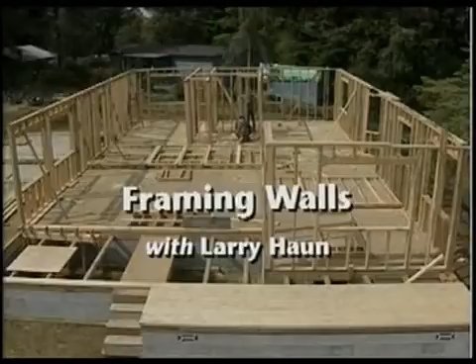Hi, I'm Larry Haun. This is the second in a series of 3 tapes which accompany a book I've written about framing an entire house. Now in tape 1, we framed the floor. In this tape, we're going to frame the walls. Here's a preview of what you're going to see.

We start by laying out and snapping wall locations on the floor deck. Then we cut and position the wall plates. Cut the parts for the walls and detail the plates. Next we can nail the walls together and lift them into position, both the exterior walls and the interior. After nailing all the walls together at the laps, we finish up by plumbing each wall and aligning.

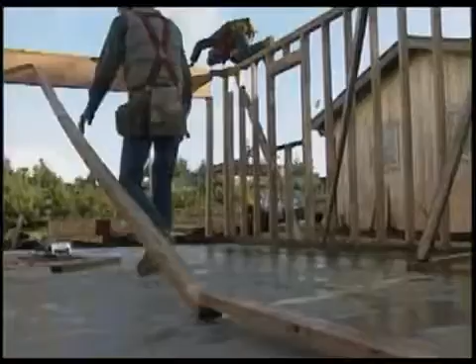Well, it's nice to have the floor down. Once the floor is down, we know we don't have to work down in the dirt and the mud anymore. And now we know that it won't be long before we have walls standing up here. To get to that stage, we have to do some layout. Now, layout's the process of taking these wall lines that we see here on the blueprint and transferring them out to the floor. We do that by means of a chalk line.

Now, layout really is simple, but I know from looking at a blueprint and seeing all of these lines out here, people say, wow, that looks difficult, but it really isn't. Here's how we do it.

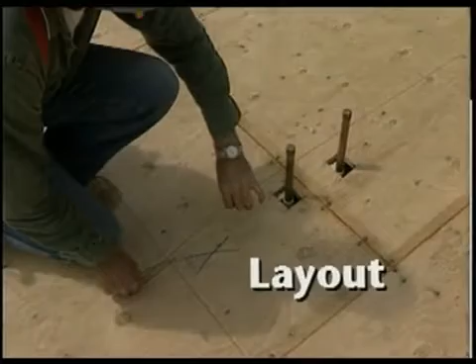Our plans for this house show that the outside walls are 2x6. And to mark the location of these walls on the floor deck, we use a 2x6 block, marking in 5.5 inches from the edge on each end of the building. Now, if your walls are 2x4, well, then use a block that size. And next, we run a dry line down the length of the building between those marks, and we tie it off.

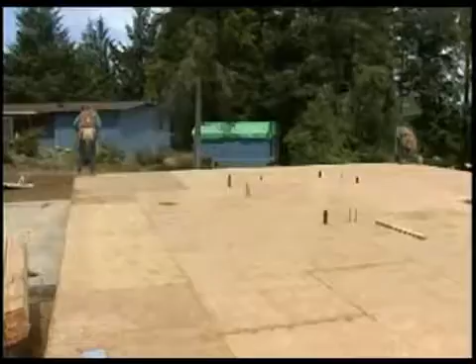We mark near the center of the dry line so we can snap the line in 2 sections. Now, especially on long buildings, this helps to ensure that our line will be straight. On shorter runs, you can just use your chalk line. I got 32.3. At this point, it never hurts to recheck to make sure the exterior walls are parallel. Okay, we're within 1/8, Joe. Looks good.

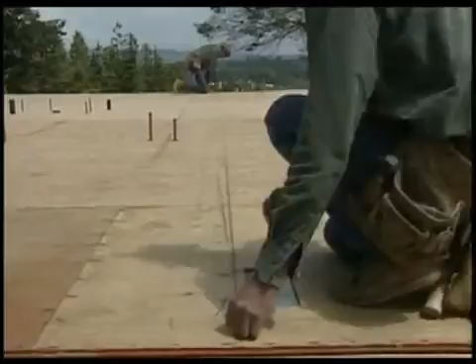We need to start with a long through wall, Larry, which is this one, and it's 17.3 outside to center. Okay, let's do it. Okay, we're at the edge of the building. Go ahead and mark. 17.3 center of the wall, add 1 3/4 inches to the edge, mark it, put an X on the side that the plate falls on. That's it. On our plans, the measurement for this wall is from the outside of the building to the center of a 2x4 wall. We snap the edge of the wall by measuring out 1 3/4 inches more from the center line.

Okay, Joe, that first wall is 12 foot 7 in, from the outside of the building to the center of that through wall. So Joe measures out 12/7 to the center of the wall, adds 1 3/4 inches to the edge of the 2x4 wall plate, and then he drives an awl at that point. Now he can continue on and mark for the next wall. Now, of course, each wall line needs a pair of marks on the floor before it can be snapped, and that's what Joe's doing here on the 12/7 wall.

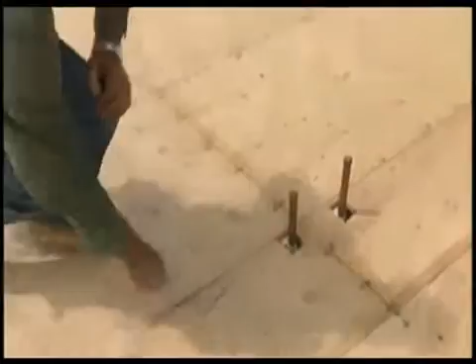And you can see this wall has some plumbing in it. Joe's laying out a bathroom wall here. Most of our interior walls are 2x4. This one's got a lot of plumbing in it, so we'll make that one 2x6. And just so we don't forget, Joe marks it right on the floor.

When we lay out a building, we typically lay out the long walls first, and then the short ones, like this short bathroom wall. Now, it's important to keep your plans handy so you can refer to them often. Accuracy at this stage makes the work that follows a lot easier. 16'6", 1, 2, 16'3 1/4. I'm coming in.

There's a small hallway right here, but no door and actually no wall, so we're going to mark this one out. And down here the line got run by a little bit too far, so we'll mark it out too so it doesn't get plated. All right, Larry, I guess all we got left to do is run an end on that wall right there and we're done. Okay. What Joe means by running an end is marking where a wall stops, and we note that very clearly on the floor.

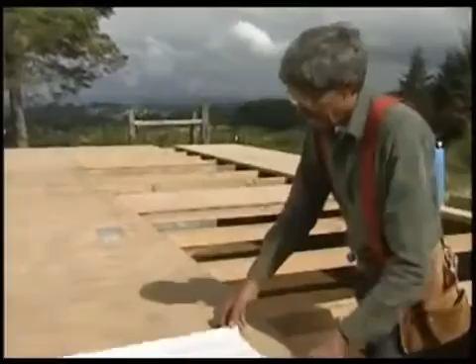Well, it didn't take Joe and I long to lay out this floor. We're all done, except we still got a rake wall. Take a look at these blueprints. Here we are right here. This is a rake wall. Goes up at an angle, follows the slope of the roof. It's the wall that sits right here on the end, all the way down through here.

We'll build it and we'll raise it up like this, and it'll go up like this, following the pitch of the roof. Take a look at the blueprints again. Each stud in this wall is going to be a different length. In order for Joe and I to build this wall, we're going to lay it out on the floor full scale. Here's how it's done.

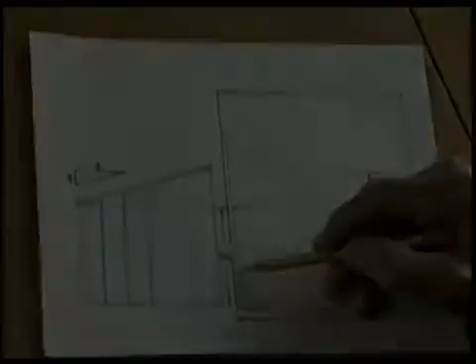I've been doing some sketching here to show you how to lay out a rake wall over here on our floor. Now this rake wall has a pitch of 4/12. Well, back on our floor, these dotted lines represent the chalk line that we snapped for our wall plates. So down here at the bottom chalk line, we come up 92 1/4. That's a stud length. Make a mark.

At the bottom, on the outside of the building, we come over 12 feet and make another mark. From that point again, up 92 1/4 inches. We make another mark. From this point, we come up in feet, whatever our pitch is in inches. 4 inches, we come up 4 feet. And we connect those 2 points.

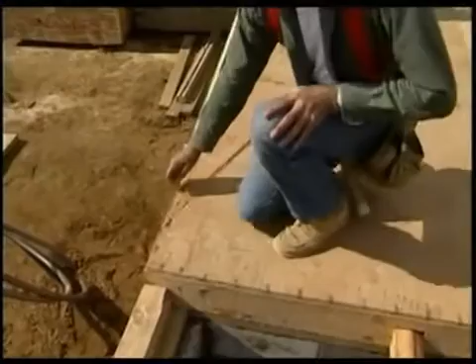Now, doesn't matter how wide this rake wall is. We can build it to here, or we can build it to way over here. With this outline, we can build it right on the floor. And we come up here 92 1/4. And another 4 feet. Then we come over here 12 feet. From the outside. Got it?

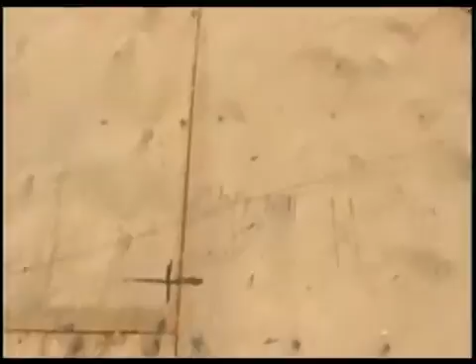Okay. Then at that point, we come up again 92 1/4. And 4 more feet, and that X is right there. So without using a lot of fancy math, we're able to establish our 4/12 pitch. We snap a line right through our X's. First one side, then the other. And this leaves us a full-scale outline of the rake wall right on the floor.

Well, Joe and I have all these wall lines snapped out on the floor. So we're ready to start plating. Plates are the tops and the bottoms of walls. The important thing to remember is that these plates need to be put down in a certain order. If we put them down in the right order, then framing walls is going to be a lot easier. So let's take a look how we do that.

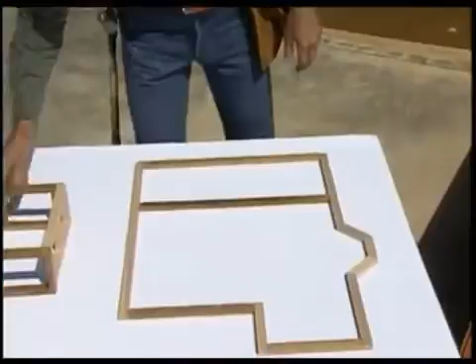Actually, it's quite easy. Here we have a model of our floor. And what we've done is we've taken these long outside walls, and we've run them all the way through, from outside to outside. We call these walls through walls. Here, at the width of the building now, these walls butt into the through walls. So we call these walls butt walls. We have them here, here, here, and here. If you plate like we have it here, you're going to find that wall framing is a whole lot easier.

Here on this model, I want to show you an example of how not to plate. You'll notice that none of these plates run all the way through. They run through on one end, but here, on this end, it butts into its neighbor. And that's true of this one, and this one. Now, if you plate like this, we call this style log cabin style, you'll find that when you raise walls, you'll always have one in the way.

But look, let me show you something simple. Make a little change. See what happens? You now have these two walls that run all the way through. And these walls butt to them. So, we'll build our walls like this. We raise these two through walls, and then we can raise these two butt walls. No problems.

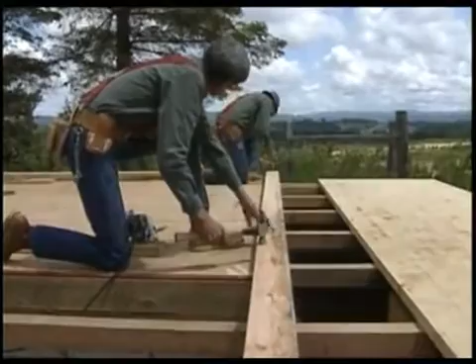At my end, I saw to the chalk line. I don't need a square or a measuring tape here to cut accurately. Here's the top plate. It's got the same length as the bottom plate, and it tacks right on top of it.

This is another butt wall. Got it, Joe? Again, tacked right on the line. I use a 2x6 block as a guide to cut it back 5.5 inches from the through wall.

We just keep working our way around the building, positioning, tacking, cutting. But take time to cut these plates accurately. It'll save you a lot of headaches later on.

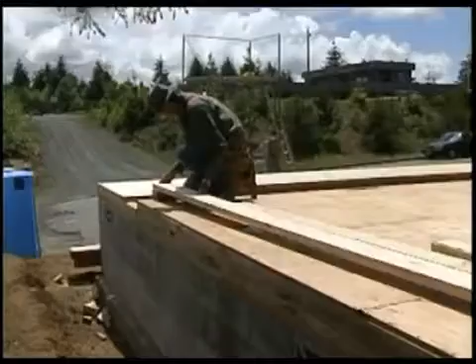You can see that this wall has some plumbing pipes in it. Here we can cut the plate so it butts the pipe. Out here in the center, we'll notch our plate to fit around these pipes. In colder parts of the country now, the code may require you to fill these holes with insulation.

And here, this top plate can't be tacked on top of the bottom plate because the pipes are in the way. So we just tack it on the side. Now it's ready for layout. Here at the end of the building, another way of tacking a top plate in place. We can set it on edge and toenail it to the bottom plate.

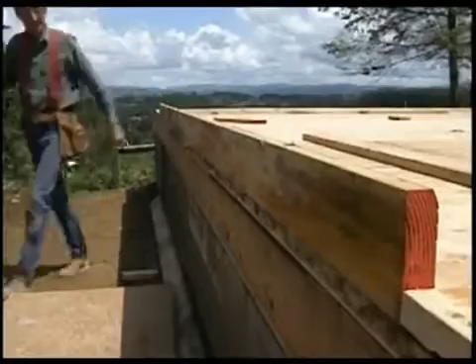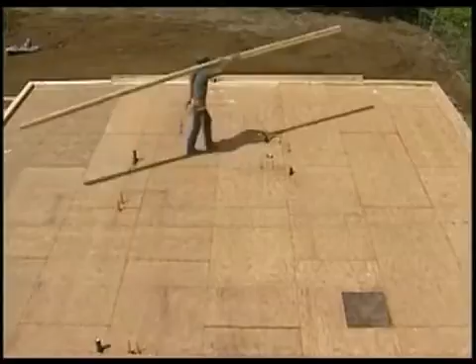Here on the other side of the house, we tack two pieces of plate at each end. Where they lap in the middle, we can cut it by eye. We're done tacking the exterior plates. Now it's time to tack and position the 2x4 interior plates.

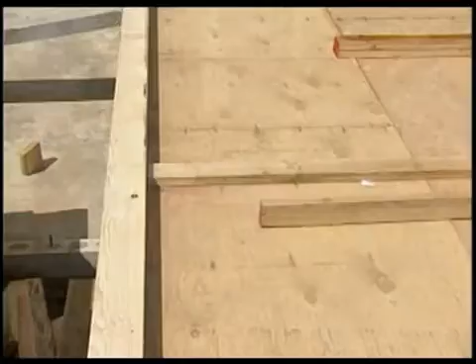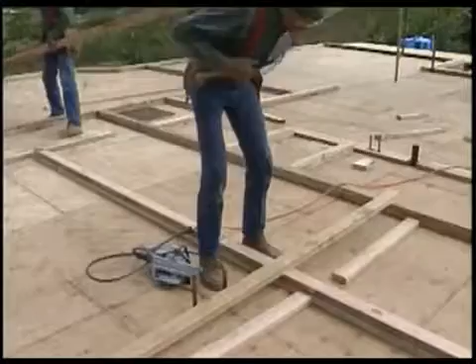Yeah, so I'll just go ahead and cut. There I go. Okay, cut that. Here are the plates for that end wall. We cut them both right on the line. That's what we do. We just keep working our way around, plating the long walls first, generally, and then filling in the short wall. It's important to tack the top plate directly over the bottom plate.

You probably noticed that I've been doing all the cutting and Joe does most of the nailing. We work together. It's just more efficient that way. Well, Joe and I are moving right along. This place is finally beginning to look like a house.

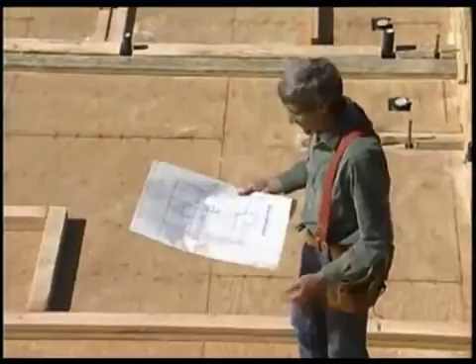All the plating is done, and you can see over here the outline of a bedroom. Here's a bathroom, and back over here in this corner another bedroom, and I'm standing right in the middle of a hall. We've done what we wanted to do. We took the wall outlines from the blueprints and we transferred them down here to the floor.

One other thing I want you to notice as you look at these rooms, you'll see over here there's not a doorway and there's not a window in the place. We paid absolutely no attention to any door or window. Well, let's take a look at these blueprints.

Here's a small closet with a doorway. What it looks like is that the wall comes over here and stops, then the doorway, then the wall starts up again. Well, here's the closet right down here. Both those plates run all the way through. There's no visible sign of any door.

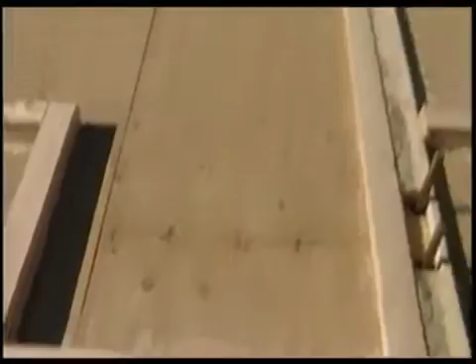Back to the blueprints. Here's another one, right here. It goes into this bedroom. But take a look again. Those plates run all the way through. So that's what Joe and I have done. We've run our top and bottom plate across all of those doorways. Later on, we'll come back and we'll cut out sections of that bottom plate and leave room for these doors.

Before we do any more work, let's review a few of the things that Joe and I have been doing. Here, this wall here, it's got pipes coming up through it. We couldn't set this plate on top of it like this. We just set it right alongside. Now, we can lay out across both of them. Here's another style. This wall, too, has pipes. So we set the top plate here on edge, and again, we can do our layout across both plates.

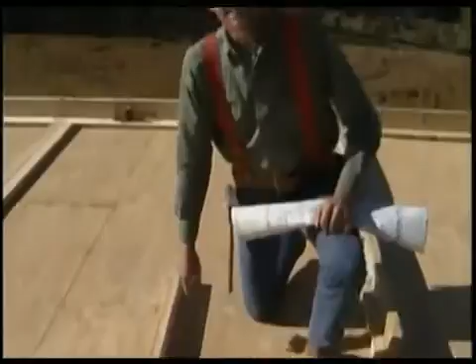Over here, 2x6 wall. Got a lot of pipes in this wall. So what did we do? We ran this wall in 2x6. That'll leave plenty of room for all the pipes the plumber's going to put in there. Here we have a toilet. We needed a little bit more room for that toilet, so instead of a 3.5-inch wall, we ran one in 5.5 inches. That's a few of the things that we're going to do. There's lots more to come. Let's get on with our work.

Joe and I have finished plating up there on the wooden floor. Now we're down here on this concrete slab, and there's a couple of differences. One is, when you're plating on a slab, use this treated wood. The second is, we've got bolts in this foundation. These bolts secure this plate down to the foundation.

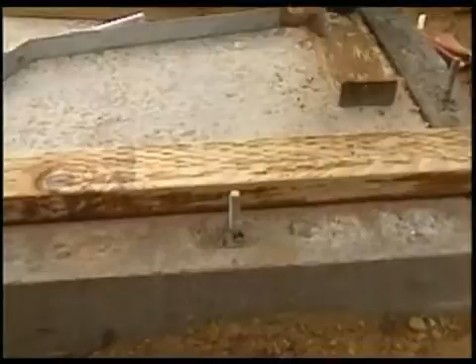We've got some holes to drill here. So how do we do it? Well, fairly simple. We just measured over here 3.5 inches, and we snapped a line all the way through. Then, here's the important part. Take this bottom plate and set it right on the line.

Now, we don't have to use a square and a tape measure to mark where this bolt hole goes. We've got a simple tool here. This is a homemade one out of a plate strap. And you'll see where it goes up against the bolt to this pin is 3.5 inches. So that's what we do. We set it right on that bolt, and then we mark it. Right there's where we're going to drill that hole.

Now, if you don't like that tool, you can try this one. You can buy this one commercially. It's made the same way. This notch here goes against the bolt, and the pin marks the hole. This one's for 2x4 plate. This pin's for 2x6 plate.

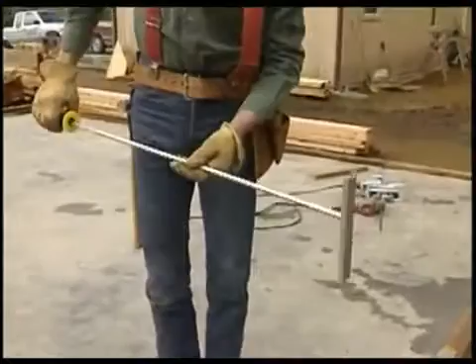Now, if you don't like to bend over, you can use this tool. It's a stand-up bolt marker. Put it on the bolt. This one works for 2x4 this way. If you got 2x6, just turn it around. Put it on the bolt, straight out. Square it up with the material. Mark your bolt.

Well, Joe and I have all our plating done up there on the main floor. You know, we're almost ready to start framing. But before we do that, we built a couple of model walls down here, and we want to show you in detail what it is we're going to build.

Over here, we have a 2x4 wall. And over here, a 2x6 wall. They're both exterior walls, and they're both framed exactly the same. These really are typical walls. Once you learn how to build these two walls, you can frame most anything you want to frame. So let's take a look at them in detail.

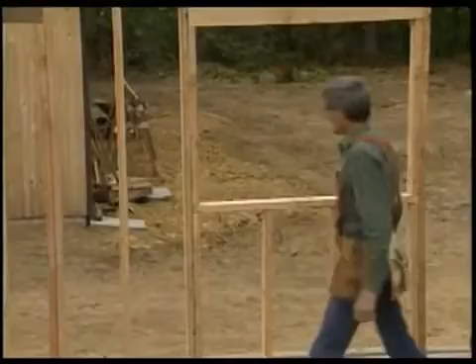Up here we have a double top plate. These plates help hold the entire structure together. Underneath these plates we nail both studs and these top cripples. These cripples take the weight from above and they transfer it down to this header. This header acts as a bridge over the window opening. It, in turn, is supported by a trimmer on each side.

These trimmers come down and set on a rough sill. The rough sill leaves an opening for the window. The rough sill is kept to the proper height by the bottom cripples. The bottom cripples go on down to the bottom plate. The bottom plate itself sits right here on the foundation, and that foundation supports the entire weight of the building.

But one last thing now about this window frame. This whole structure is held together by these two king studs that are nailed one on each side. They run from the top plate clear down to the bottom plate. Now, one of the things that you're going to notice looking at these headers is that they run throughout the building at exactly the same height. Well, carpenters maintain that height by use of a story pole. Let's take a look over here.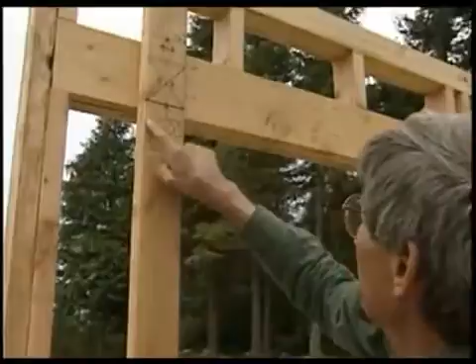The standard height for us where we frame is 6 foot 10 inches, right there. And once we know the size of the header, here we're using a 4x6, what's left over on this story pole is the length of our top cripple. Here we have a 3/0 window opening. That's carpenter talk for 36 inches. On this story pole, we've laid out for the rough sill. Well, what's left over on that story pole is then the length of the bottom cripple. That's simple enough. Now let's take a look over here.

What if we use a 4x12 for a header? Take a look. We don't even have to use any top cripples. Well, what about if we have a smaller header and a taller window opening? That's where the story pole comes in again. We have a 4x4 header right here. What's left over on this story pole shows us the length of this top cripple. Now down here we have a 4/0 window. That's 48 inches. Again, what's left over on this story pole is the length of this bottom cripple.

Now, one more thing about window trimmers. You remember over here we used a floating trimmer. It goes from the header clear down to the rough sill. That's the kind of trimmer that we use when we're nailing in wooden window frames.

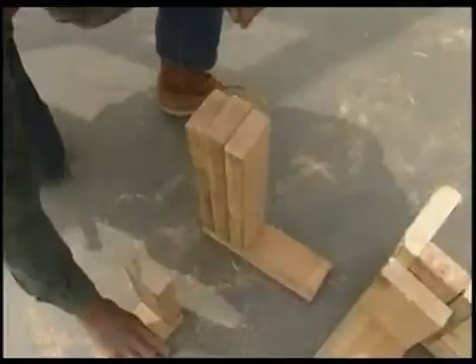So now let's take a look at corners and channels. Well, here at the corner is one place we tie this building together, here and up on top. I know it's hard to see what's going on there, so let me hop down on this garage slab and look at a model. Here we have a 3-stud corner, very typical. The exterior partition comes into it, this nails into the corner, and it leaves backing for drywall, both sides.

Now, if both walls are 2x6, we do it a little differently. Again, a 3-stud corner with a 2x4 flat in here. Then the exterior wall comes up against that and nails together. There is a third solution to this called a 2-stud corner. You can nail a stud like this and a stud like this. That'll give backing to a wall coming into it and still leave backing for the drywall. The difference between this one and this one is that this one's stronger. This one takes only 2 studs.

At the top, we tie these walls together with a lap. We cut back the double plate on one and lap it over on the other. They go together like that and nail together with 2 16-penny nails.

Now here's another place that we have to nail our walls together. But this is a little bit different situation. This is an interior partition that nails into an exterior wall. Let's take a look at our model. Our exterior wall has 3 studs like this. They form what we call a channel. To that is nailed the interior partition. And then on both sides, we have backing for our drywall.

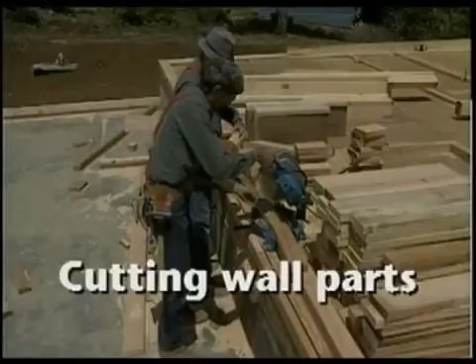Well, before Joe and I can put the walls together, we need some parts. The most efficient thing to do is cut all the parts at one time. Here, I've got the chop saw set up. I'm cutting bottom cripples. We can also cut top cripples, sills, and headers at this stage, and stack them right up here on the deck near the saw.

When you're cutting thick headers, it's handy to have a circular saw this big, but you could also use a radial arm saw or make 2 cuts with a smaller saw. Here I'm cutting the rough sills, and as you can see, I've got the window dimension marked right on the sill. That makes it easy to look at the plans and find where each header goes. And for now, I just tack each sill to its header.

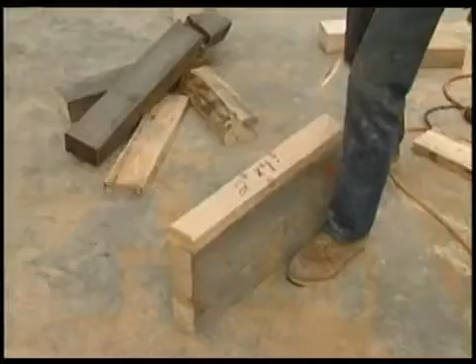Didn't take Joe and I long to cut our cripples, and over here we have our headers. We knew how many we needed because we made ourselves up a cutting list. Most of the information on this list came straight off these blueprints. For example, here we have a 6040 window that takes a 4x6 header. We took that and we listed it right up here, 6040. We counted and we found we needed 8 of those headers.

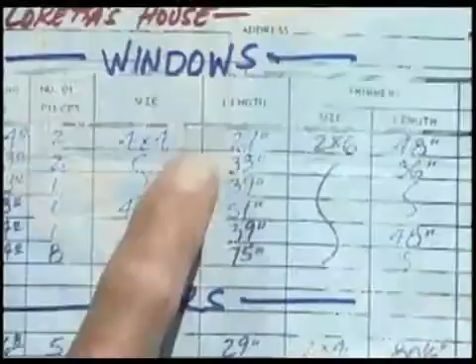We counted all the windows and doors that we needed on these blueprints and we listed them right on our cutting list. Now, the length of these headers, well, that varies, but there's a lot more about this in the book. Over here, we have the length of our trimmers and our top and bottom cripples. That comes straight off the story pole. Down here, we've totaled up the number of top and bottom cripples that we need. We got that by cutting 1 cripple for every foot of header. It's as simple as that.

The next thing we do is scatter all our headers. Scattering headers on the plates means that we match the size written on the plans with the size written on the headers and place each one in its approximate location on the plates.

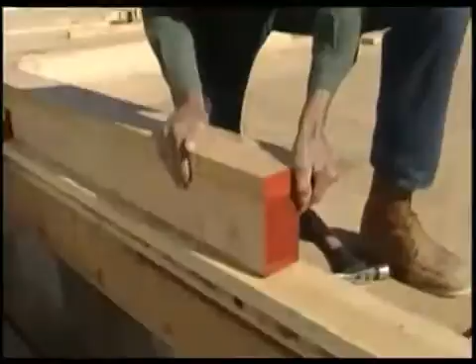Well, that's the last of the headers. Now we're going to start a new process, an important one. It's called detailing the plates. Now what that means is that we have a lot of marks to put on these two plates, marking the location of headers and all the studs. We have to do that before we can begin framing.

First of all, we're going to start with this header, put it in place, and then we're going to mark where it goes. We call that spotting headers. Take a look here. I'm right in the middle of this bedroom, right here. And we have a 6040 header, and we note that it centers in this room. Let's show you how that's done.

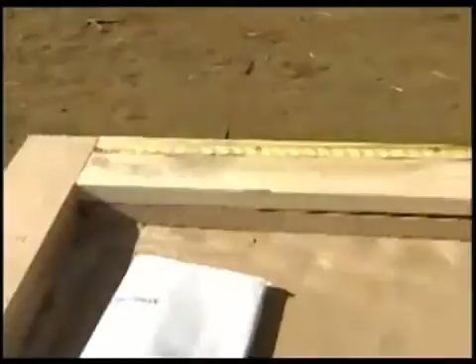Take our header, shove it into the corner. Then, with the tape, we measure out of the other corner to the header. And we have 49 inches. Half of that is 24 and a half. So we come off the wall, 24 and a half inches, and we make a mark.

Pick up our header, set it right on that mark, mark it like this. Then we come down, put a mark there and a mark there. King stud goes there, king stud there. This is open.

Marking this end is just a little bit different because it's plated differently. We'll put our mark like that, and then all the way down those two plates. Our X goes here for our king stud, and a line goes out here to show the opening. That's it.

Well, that header's spotted right in the center of the wall, but not all headers center. Let's take a look here on the blueprints. Here's another window header right in this bedroom. Now the plans show us that we spot this header 3'6" from the center of this wall to the center of this window. We'll use a measuring tape and spot that window accurately.

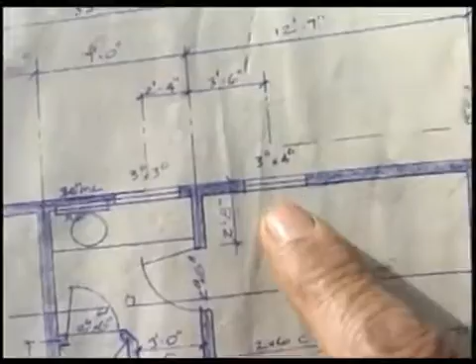Now let's take a look down here at a door header. Here's one in the bathroom. There's no measurement along here telling us where to spot that header. But you see this little stub wall? That means that this header spots one stud out of the corner. We do that by eyeball. Just like that.

Well, you can use the eyeball method on some headers, but others you have to measure. Like this one, Joe is centering for a closet. I'm going to center this thing just by looking. Now this is another closet, but it's one stud out from each corner, and Joe just eyeballs the location.

Here we are in the garage, and the garage door is big. The code requires a big header. The layout for it, it's the same as for any other header. A line indicating the edge of the header, and then an X on each side for the king studs.

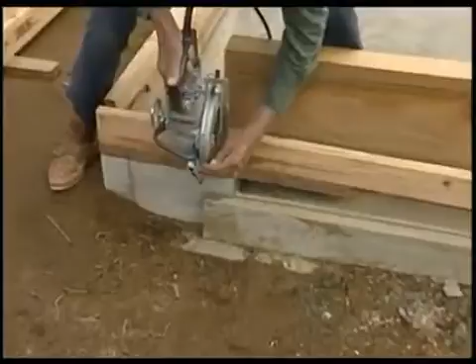Okay. Now this garage header is an exception. There are no top cripples above, and in fact, since we need enough headroom for cars, we eliminate the top plate, and we note this on the header.

With the headers detailed on the plates, well, the next thing is to mark wall intersections. This is where the channel studs will be. I'm using a homemade tee. It's made out of 2x4s for this. You can see that I've marked on each side of the plate and across the top and edges. Here's a lightweight corner marker. It's aluminum, but it serves the same purpose.

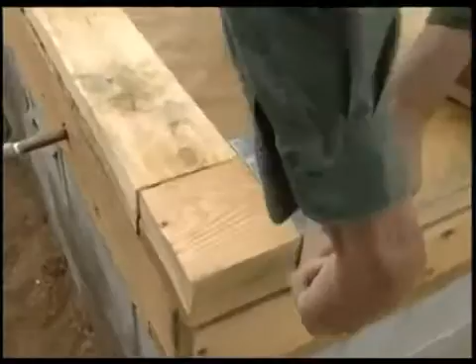We can also use the same device to lay out our 2x6 wall. Here we are at an exterior corner. And this is an inside corner. The main thing to remember here is to make sure to mark all around. And then indicate where the partition wall will be.

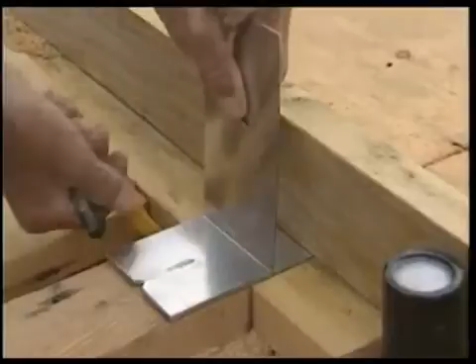When you've got the plates lying flat because of plumbing, just mark one plate, extend all the lines, and then transfer the lines to the other plate. Here we've got a top plate sitting up on edge, and we just have to mark the lines all the way around. Getting the layout right at this stage will make for square and plumb walls later.

We've got all the corners and channels marked, and now Joe's laying out where extra studs and blocks are needed. In the bathrooms, we need to lay out extra studs that'll go on either side of the medicine cabinet. And we also need flat studs that'll act as backing for the bathtubs. Joe just marks these clearly on the plates.

In the same area, we need to place a stud on each side of the water pipes for the tub. This will leave room for the plumber. The book has a lot more about this.

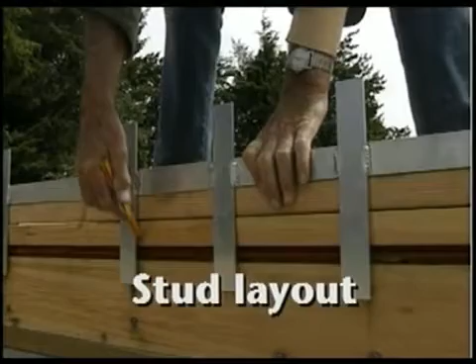Well, all our detailing is finished, except we still have to mark stud location on all these plates. When I was learning to be a carpenter back in the late 40s, I was taught to hook my tape on the outside. Mark 16 inches on center, 32, 48, and so on, down the line, never changing layout at all. But since then, I've learned to change and do things just a little bit more efficiently.

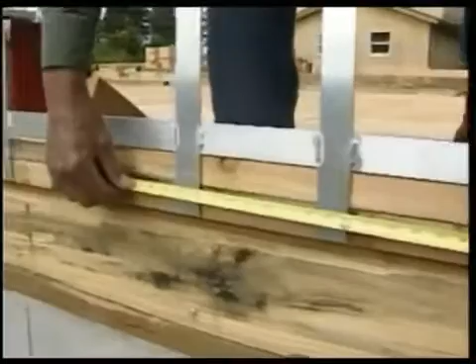First of all, we use this layout stick. It allows you, without a measuring tape, to lay out your studs at 16 inches on center, 32, and 48. Or, if you want to use this middle leg, then you can lay out your studs at 24 inches on center.

Instead of starting our layout like we used to here at the corner, we started right here. And that's because at that point, we have a corner that's going to set in there, so we already have a stud there. So that's where we begin our layout. We mark our first layout and our second. And that takes care of this section of the wall. The studs are 16 inches on center, it complies with the code, and is structurally sound.

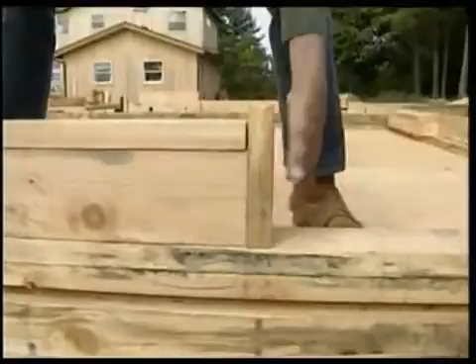So now we have a header. We know that at the end of the header, we have a king stud. So that allows us to begin our layout right alongside this king stud. We can lay out our top and bottom cripples, 16 inches on center, just like the rest of the building. Here we are at the end of the header again, another king stud. So we can change layout again. Beginning right there, we take off 16 inches on center.

Now, here's something that's interesting. If we continue our layout from this point, 16 inches on center, then between these two walls right here, we get two studs in this short little section of wall. But we really don't need that many. Let me show you what's going to happen. At this point, we have a channel. So we already have a stud right here. That allows us to begin our stud layout all over and put one stud right here. And that's all we need.

So now, what does it mean to change our layout constantly up and down these walls? Well, it means that we're going to save a lot of studs and time. We comply with the building code. There's no change in the building structurally, and there's plenty of wood down through here to nail on our drywall and our siding.

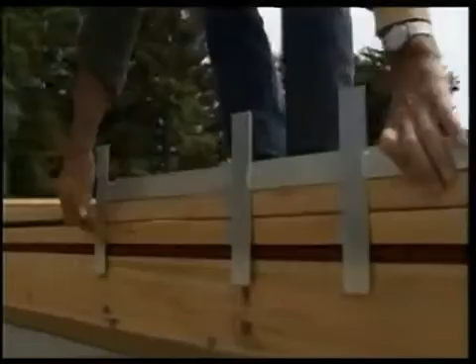Here, Joe's laying out a section of exterior wall that has no doors or windows in it, no headers to mark, so the work goes real quickly. But here, there's a header in the way where a window's going to be, so the layout slows down a little. He has to mark the location of both the top and bottom cripples. Joe first extends his line down on the header, then marks the plates by eye.

The inside walls get marked the same way. Here, he's using the long prongs so he can mark across the two flat plates at once.

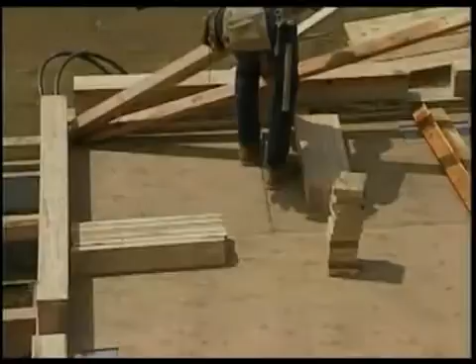Well, now that the plates are all detailed and we know where the parts will go, we can start scattering the cripples. We know how many we need, one at each end of the header and one for each layout in between. And you can see we took time to mark the lengths of the cripples on the headers so we know where they go. On this wall we have 6 1/4 inch top cripples and 30 1/2 inch bottom cripples.

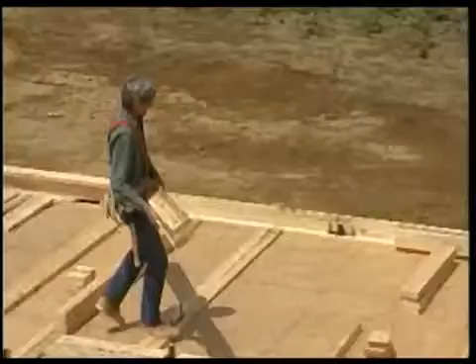With the cripples in place, we can scatter our king studs, not haphazardly, but one at each end of every window header. We start framing a window by separating the sill from its header, dragging it back into its position, and then bringing the header back into its position.

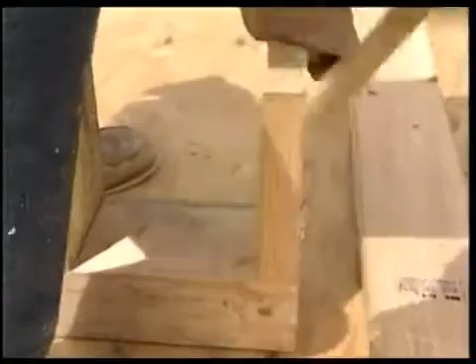The next thing is to toenail the cripples to the header, following the layout lines. We hammer in two 8-penny nails from one side, and after they're all in position, we go back and toenail from the other side. That's the code. Then we flop the header unit on its side and position and nail off the bottom cripples. Two 16-pennies through the sill into each cripple. That'll do it. And right there, you can see our layout lines.

Next, the king studs get nailed on both sides, and this holds the whole window frame together. Make sure to flush the king stud with the end of the bottom cripple. Nail a couple of 16s into the end of the rough sill, and at the top, flush it up. 3 or 4 16s through the king stud into the header. That'll hold it just fine.

The nice thing about building this way is that if all the pieces have been cut to the proper length, then the rough opening should be just right. Here's another look at how I do it. First, I separate the sill from the header and position them both. I know roughly where these go because the king studs are on either side, and I can spot where the top end is. Next, I position the bottom cripples. Then I nail them off. And then I do the same thing at the top.

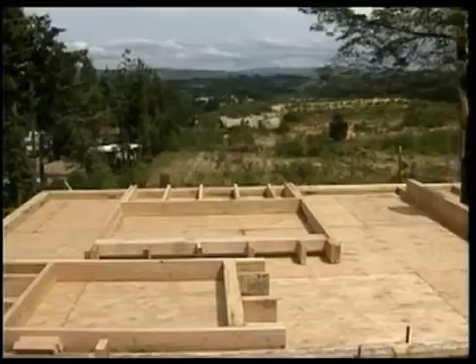Finally, I nail everything together with the king studs. Again, make sure all those ends are flush. And that's all there is to it. We work our way around the building nailing all these units together. And what is important is that you complete each step before starting another.

With all the window frames nailed together, we can start building walls. We scatter all our studs, and with these in place, we pull loose the top plate, walk it back, and begin nailing. Here we're nailing to one of the window frames, following our layout on the plate. Joe and I find it more efficient to start at one end and just keep working down the line, bringing up pieces of top plate as we need to. And you'll notice this wall is raised up off the floor a bit. That's because it's sitting on other walls.

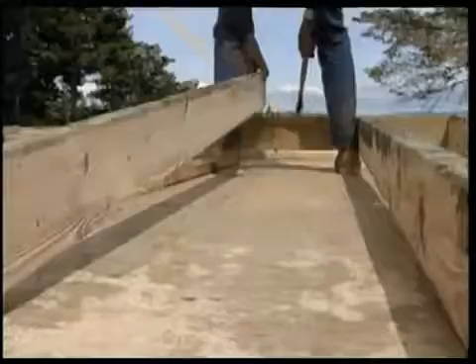Now it's true, we're pretty fast at hand driving these 16-penny sinkers. But if you have a nail gun, you might want to use it. This is a channel unit. Another wall will intersect at this point. It's nailed together with 16-penny nails along the side and through the plates. Once the top plate is nailed on, we nail off the bottom.

Now the double plate goes on. Joe holds this end 5.5 inches back for the lap. And I cut the other end just to one side of an interior wall channel. Now the idea is to nail off the double plate along the entire length of the wall, leaving gaps only where the double plate of intersecting walls will lap over. You can see that pretty clearly here.

Long, heavy walls are usually broken into sections. Joe's just nailing up to a place where we're going to break this wall. The double plate has to lap at least 4 feet at any break in the top plate. On the other side of the break now, Joe starts the nails. We'll finish them off after the walls are raised.

Walls need to be braced. The code requires a brace in each corner and one every 25 feet. You could use plywood sheeting. Here we're using 1x6. We just position it diagonally across at least 4 studs, letting the ends run long. This 1x6 is flush with the wall face. No marks needed. Just cut along each side of the brace with your saw set to the right depth and work your way down.

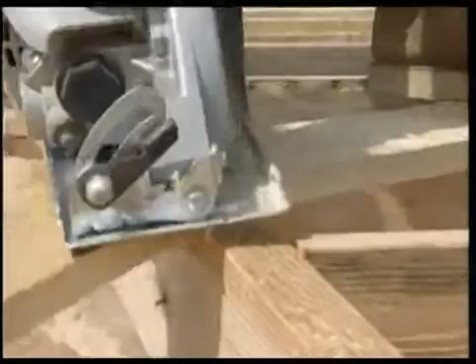Then, with the 1x6 out of the way, just lay your saw over on its side and remove the waste carefully with a plunge cut. Well, here's how the brace fits. I put it in position, then nail off the bottom end and the first stud with 8-penny nails. And then just start nails over the remaining studs and the top plates. They'll get nailed off after the walls are plumbed.

And finally, I mark the trimmers to length and cut them accurately. These trimmers get tacked in place with a 16-penny nail. They'll be adjusted later on when we get the windows set. Well, we're about ready to raise walls. Now, to keep the wall from sliding off the edge, I'm nailing these pieces of 2x scrap to the rim.

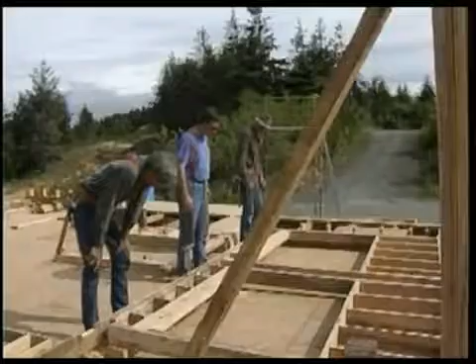On this section of wall, we separate the double plate from the top plate a little bit. Then we raise it. Remember, be careful here. Lift with your legs, not with your back. You can see we already had the first section of wall up. Now, having separated the double plate from the top, these walls go together easily. The next thing I do is nail the 2 sections together at the lap. Okay.

Well, sometimes you need to move the wall one way or the other. Just stick your hammer claw into the plate and lever it into position. When it's right, we nail the bottom plate to the floor with one 16 in every stud space. The code doesn't require exterior wall sheeting on this house. When it does, we find it easier to sheet after the walls are raised. There's a lot more on this in the book. Finally, we run temporary braces both inside and out.

Yeah, well, let's do it. Up we go. Yeah. Looking good.

Temporary bracing on every wall is important. Nail enough braces on them so they won't fall over on you.

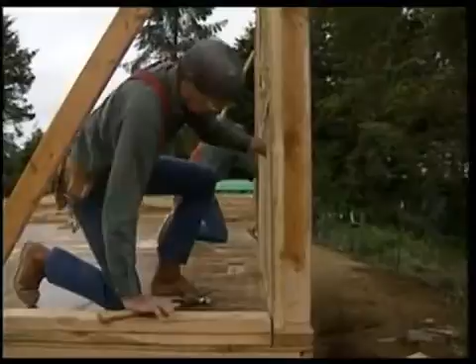Okay. We always need to keep our plates right on that inside chalk line. Sometimes you need a toenail to move it over. Get a hold of it. Up we go. Everybody together. Yeah. That's it. Nice and easy.

Actually, we didn't have much trouble with this long, heavy wall. It really helps to have some strong people. A couple other things that we did made it easy. When we nailed this brace on, we left this through wall leaning out a bit, here 3-4 inches. That way, when we raised this butt wall, they didn't bind together.

Sometimes, too, you have to cut back a 4-foot section of this double plate. We got it tacked on right here. Later on, we'll nail it up on top. It laps over this through wall, and the two tie together right there at the corner. Now, if we hadn't cut this double plate back, we'd have had a problem raising this wall.

Let me show you on this model wall down here. Here's the way a double plate goes. It laps over 5.5 inches on this 2x6 wall so it can tie in. Now you'll see when I raise this wall that I don't go very far before I hit this cripple.

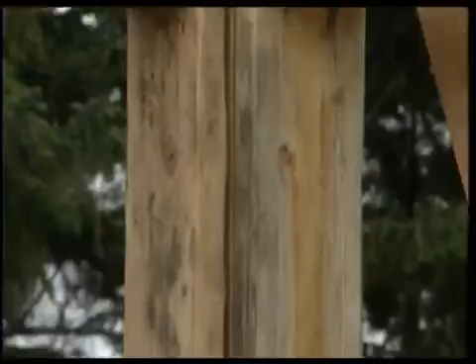It's time now to nail this corner together. What we want is this top plate of the butt wall to join tightly with the top plate of this through wall. Well, that's going to be pretty easy because when we nailed in this stud, we held it back from the top plate about 1/4 of an inch right here. This allows these two plates to join tightly together. Most codes require that these corners be nailed together with three 16s.

As we continue framing, we have to tear off these temporary braces. We knock it loose at that lower end, and then you can use your hammer as a fulcrum. It'll pop right off of there like that. We've got most of the exterior walls up, and we're building the interior ones. We frame and brace them in the same way as the exterior walls.

When you're nailing channels together, sometimes that backing stud drops down into the pocket. Just pick it up with a 16, then nail it off with three 16s on each side. Here I'm cutting blocking for the medicine cabinet. I push the board up against the stud and I cut it by eye. And then I nail the blocks at the right height. There's more on this in the book.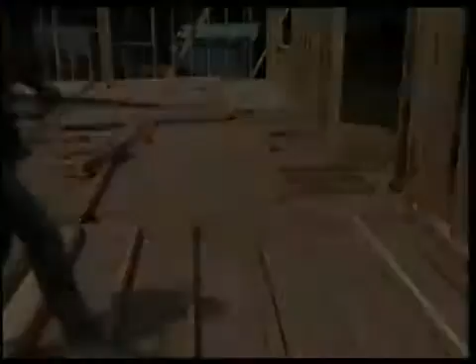The inside walls need double plate just like the outside ones, and you can see I'm holding this piece to one side of the channel. I want to show you now another way to brace these walls. Here we have a metal framing brace. It forms an angle, and we have holes here in it to nail it off. We lay it down on our wall diagonally, and we make a mark on the top plates and on each stud.

Then it's simply a matter of making a saw kerf along the line, the depth of the brace, snaking the brace into that kerf, nailing it permanently at the bottom and holding it temporarily here at the top with a bent nail. These metal braces are a good alternative.

Way back. We build as many walls as we can at one time and then we raise them. Walls are always built and raised in a certain order. I'd like to be able to tell you what that order is, but each house is different. In general, we try to raise the long walls first, but in reality, it's one of those things you have to learn by doing.

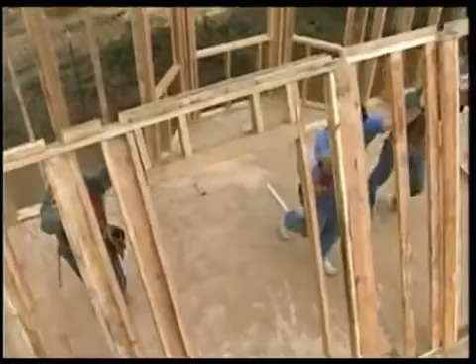Let's go gently with this thing now. Let's pull it, again, we pull it back away, just lift it. There we go. We got something backing off to you, okay? Picking it up and backing it off. Now it's just a matter of fitting them all together. That's got her. Signed, sealed, and delivered. We gotta slide this one in a ways, huh?

That's it. Up we go. The thing to realize here is that because these plates were fitted tightly together on the floor, they'll fit tightly now that they're raised. We make sure each plate is on its chalk line, and then we nail it to the floor.

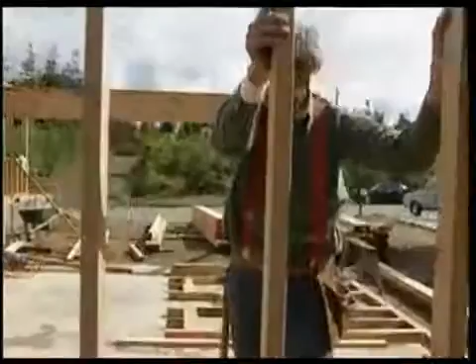Well, let's raise it. We can't forget to raise the garage walls. Yeah. Raise these walls right up on the bolts. Okay, I'll have to lift her over. You got the wall? Yeah, I got it. Alrighty. Here we go. Then with a short piece of 2x, it's easy to shift them into place. Crank her down.

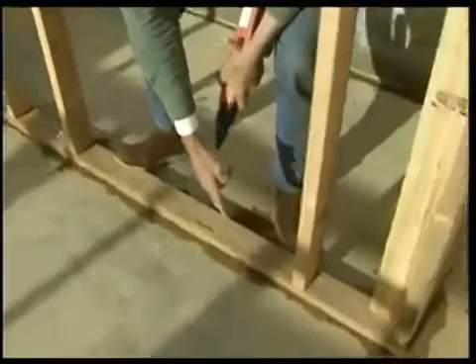We're here working on this slab. Now, all of the bottom plates down here of every interior wall have to be fastened to the concrete. On the outside, it wasn't any problem. We have bolts there coming up through the foundation. Here on these interior walls, we can fasten them down with this gun. It's a powder actuated tool. It has a clip, and these blank shells fire a pin.

Here's a pin. It's basically just a hardened nail with a washer on it. We load that gun by pulling the barrel forward, just like that, shoving it back. Then this pin goes in the end of the barrel, and it's ready to fire.

It's important to remember that this is a firearm, and it needs to be treated with respect. Matter of fact, if you're working on a construction site, you need to have a license to operate this tool. So be careful of it. Protect others, and look out for yourself too. Wear protective lenses, and put these on your ears.

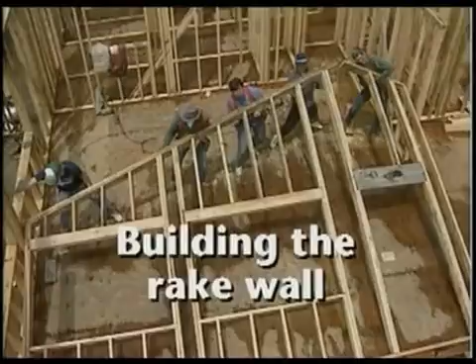Well, it's finally the right time, and we've got enough room to build our rake wall. Remember, this is the end wall we snapped out on the floor. The top of it follows the slope of the roof. On a rake wall, we nail the bottom plate on first. Then we bring up another plate, identical with the bottom, and flush up one end. Now the tops of these studs run long and will be marked and cut in a moment. Right now I'm placing them flush with the layout marks on the plate.

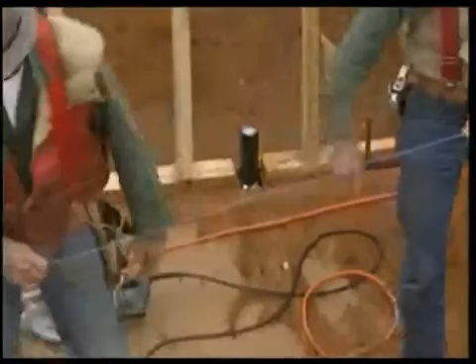I think we got it. Looks good. Once they're positioned, Joe and I transfer the chalk line we originally snapped on the floor to the studs. This line is where we'll cut them. Then with our saw set at 18.5 degrees, we cut one end of the top plate to the angle of the roof slope. We butt that in to the through wall and lay the plate right on that chalk line. We mark a square cut on the other end, then place and cut the shorter rake plate. At the ridge, we leave a gap between the plates for a beam.

Now, since the top ends of the studs are in their correct position, I can sight down and run a layout on this plate. With the plate out of the way and the saw again set at 18.5 degrees, we can cut the studs and cripples to length. Then the plate gets nailed on. There's a lot more about rake walls in the book.

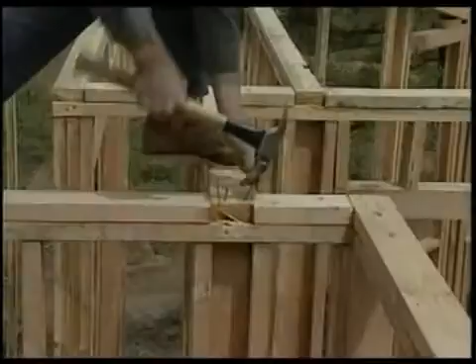Well, we're now nailing off where our double plates lap at the corners and channels. We want to draw these walls up tight to one another, right on layout. Sometimes that means using toenails to bring them together, and then a couple of 16s through the lap. Here it is again. This is what we do with the toenail. Here you can see that we're nailing it right on the layout marks. This is a corner, and again, we want it to be drawn tight, flush with the outside.

Here in the odds and ends category, often you have to use a plate strap to tie one wall to another. In this case, the garage to the main house.

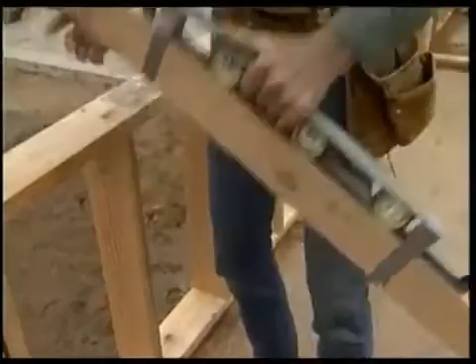We're ready to plumb our building. Plumb means that we want to make these walls straight up and down. Now you can use a 6 or an 8-foot level to do that, but a lot of carpenters like to use this 2-foot level. We attach it to a stud at the bottom here, and at the top we put on a 1x extension. That allows us to reach this top plate.

Now the most important thing about this plumb stick is to make sure that it's accurate. There's a way to do that. Take it and place it flat against the wall, like this. Put that bubble right in the center. Make a mark here at the top and one at the bottom. And turn that stud all the way over. Put it right on those marks. And check your plumb stick. This one's right on.

But a lot of times it's not. A lot of times this level gets beat up, or the plumb stick itself is bent. So what you can do is loosen the level a little bit. Take a wedge, slip it in here at the top, like that, or another one maybe down at the bottom. It depends on which way the stick has to move. Put your tape back on and check it again. It may take 2 or 3 times to get this plumb stick accurate, but the important thing to know is that even though you have a bad level and a bowed stud, you can get it accurate.

This away? Starting here in the corner, Joe holds the plumb stick, and I use the stud as a brace, with the top end pointed the way the wall needs to move. Every wall needs to be plumbed. Most walls need to rack one way or the other. Then, when it's good, I nail it off.

On this wall, I'm using a 1x6 push stick to rack the wall. The bottom end of it is cut at an angle so it can dig into the floor. I got her. I'm going to nail her off. Once Joe tells me the wall is plumb, I can nail off the braces. This way. That way? Yeah. Okay. Got her? Yeah. All right, coming in. A little or a lot?

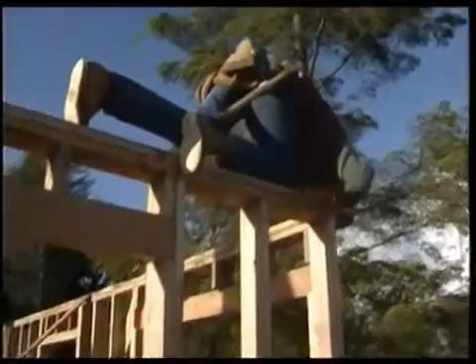The next thing to do is eyeball our walls for straight, moving them in or out. Yeah, that's it. This wall has to come in. I've nailed a 1x6 to the floor and the top plate, and I'm using a short stud as a levering device to bring the wall in.

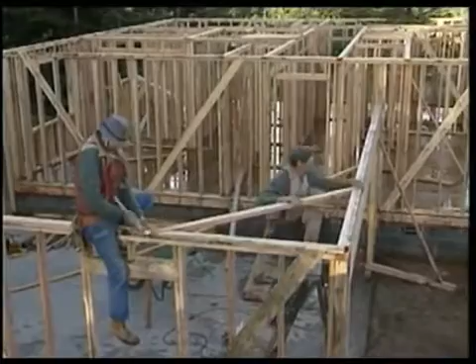Out here in the garage, the walls have to be straightened, but there's no wood floor to nail into. So I extend a 2x out from the wall plate that I can nail my brace to. Push the wall out a little bit. Got her. It's also important that the header over the garage door is straight. So while Joe sights, I run 2x's to the opposite wall plate and again use a levering device. When everything is good, we let in a 2x4 brace to keep the garage corner square and the header straight.

Another way to align walls is by stretching a dry line from corner to corner, and this line is held out 1.5 inches from the wall at each corner. At the middle of the run, Joe checks for straight using a 2x scrap. I push the wall in or out. When it's good, we nail the brace.

Well, we have all our walls framed. We can straighten up a little bit and look around. Still got a lot of work to do. This front wall, for example, has a lot of windows in it. We couldn't get in a permanent brace. We'll come back on it later and nail on some plywood shear. Over here in these doors, you'll note we don't have our trimmers in. We like to wait on door trimmers. When we set our door jambs, then we'll get good straight stock.

Now, this is a one-story house, but you might be building 2 stories. So what's the difference? Well, first of all, you have to have a heavier foundation. You got to pour a little more concrete. But this frame, it'll support a 2nd story. And if you know how to build this 1st floor here, well, then you can build a 2nd floor. There's very few differences between a 1st and a 2nd floor.